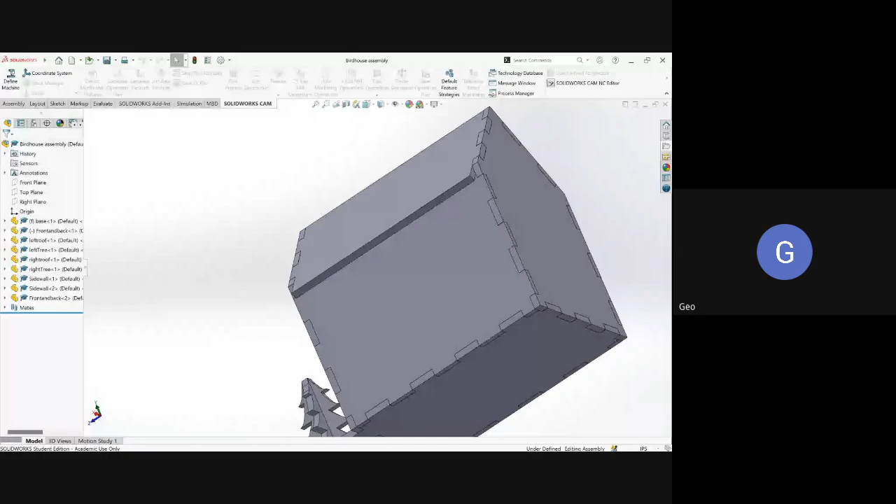All right, we are going to run through how to make a birdhouse like this. Now, obviously, this is missing some details, and as you make yours, in addition to the details that this is missing, try and make it unique, make it your own.

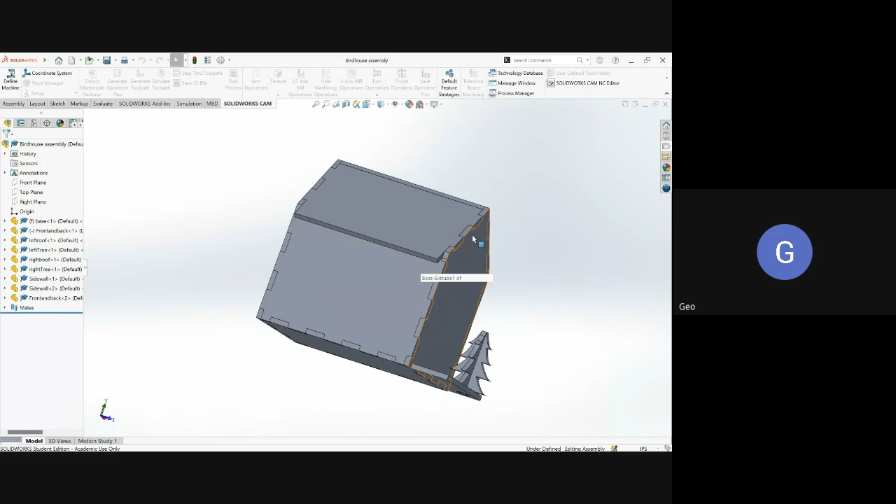Try and also understand the different types of joints used to create this project. If you have a good understanding of those, you'll be able to use them in future projects and won't have to copy.

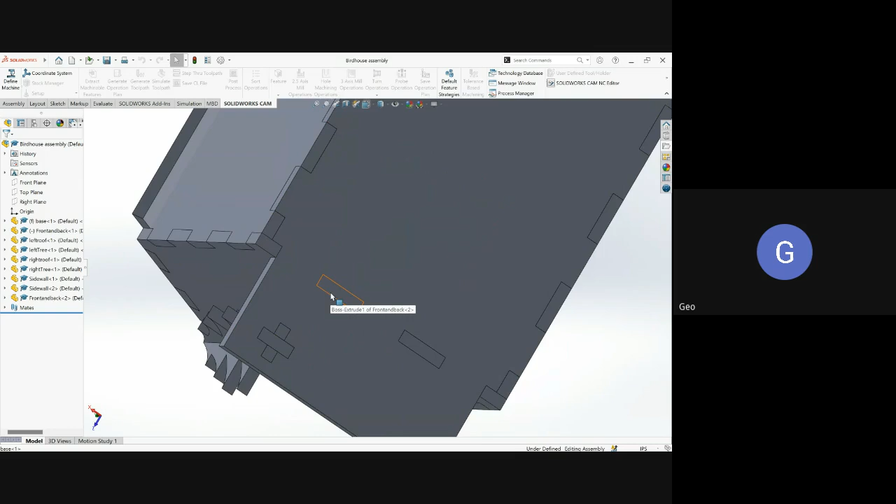So these are finger joints along the side, and joints where you get something slotting in here like this, that would be a mortise and tenon joint. And then actually, I mentioned slot, but the tree was made with a slot joint, a little bit hard to see from this angle.

But as you look at the part files, you'll be able to understand how the tree was a slot joint. So those are the three main types of joints.

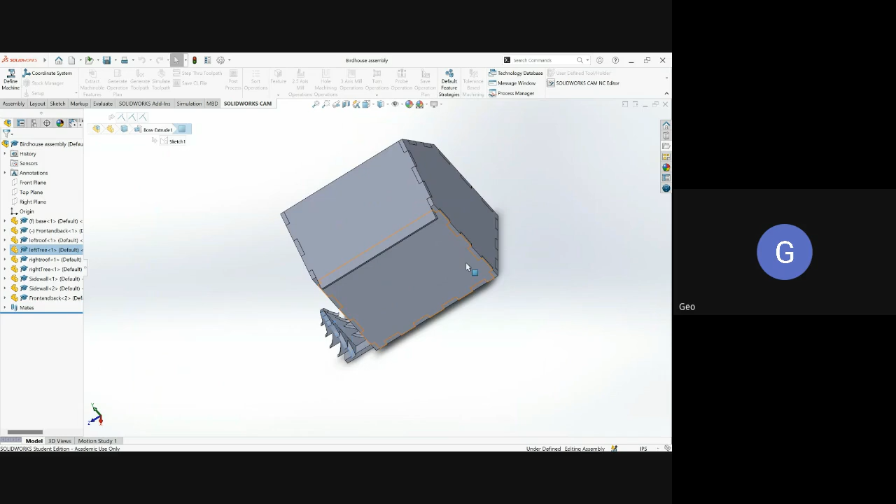There are other things you can do with the laser cutter to make curves and other things, so don't be afraid to use Google to come up with ideas.

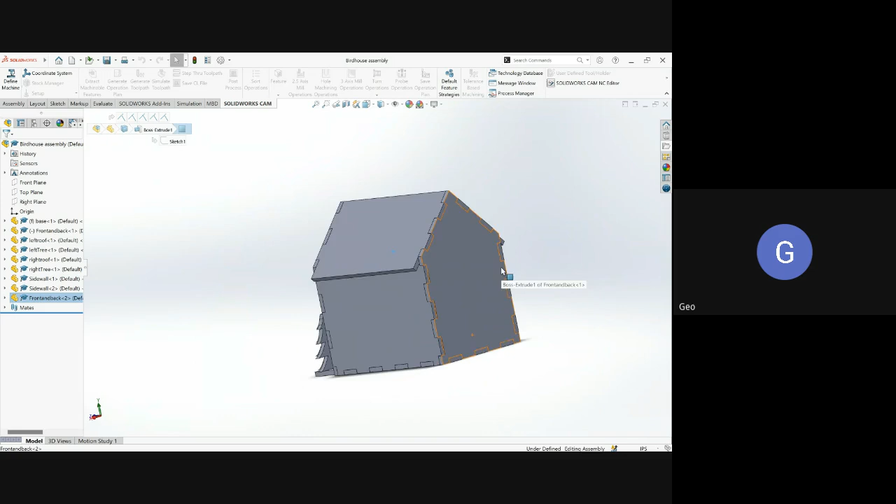Also, this is partially why we do this, because I am now seeing there's a little error in my file. So we're going to make this in SolidWorks, and then you'll be able to laser cut it. But if there are things that don't match up in SolidWorks, that saves us some material.

All right, to get started, you would do File, New, Part, and you are going to start immediately by checking what units you're in.

So we do not want to be in MMGS, that's probably what your SolidWorks defaults to. We want to be in IPS.

Once we are in IPS and we're in a new part, remember there's the features and the sketch menu. We always start with a sketch, and I'm going to show you all this.

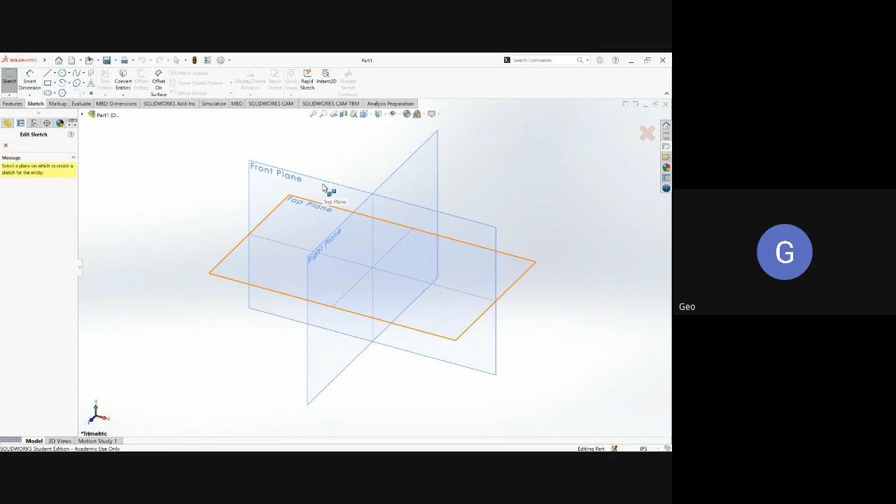So we click the cogwheel up here, switch over to document properties, click grid snap, make sure display grid is on, major spacing 1 inch.

Our material is 1/8 of an inch, so we're going to divide our inch major spacing into minor spacings of 1/8 inches. We will go to system snaps and make sure enable snapping is on.

This grid is the one that's really important, so when we're done here, we can hit OK.

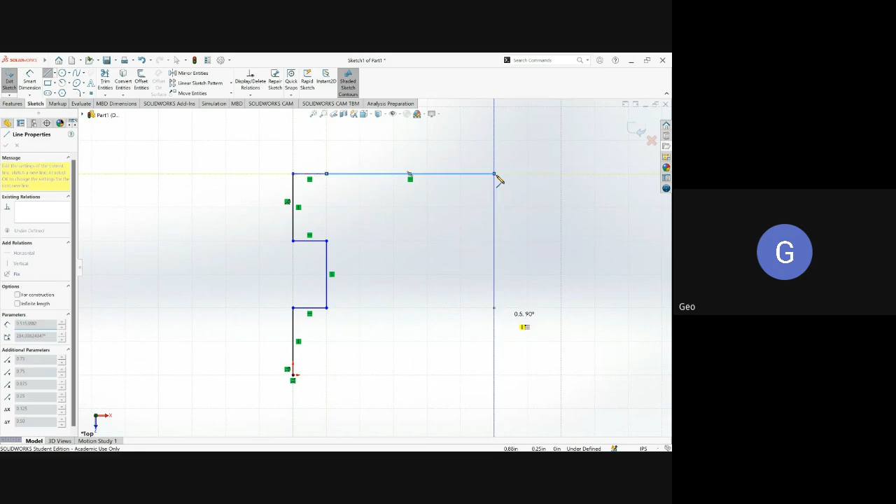Then you'd be able to follow the template on Schoology to create something similar to what we had before. Eventually, this is not how you would make it, but I'm just going to do a little demo real quick.

Eventually, you're going to need to go to your three-dimensional features menu and extrude it. Remember, our material is 1/8 of an inch, so in SolidWorks, you can type in mathematical functions.

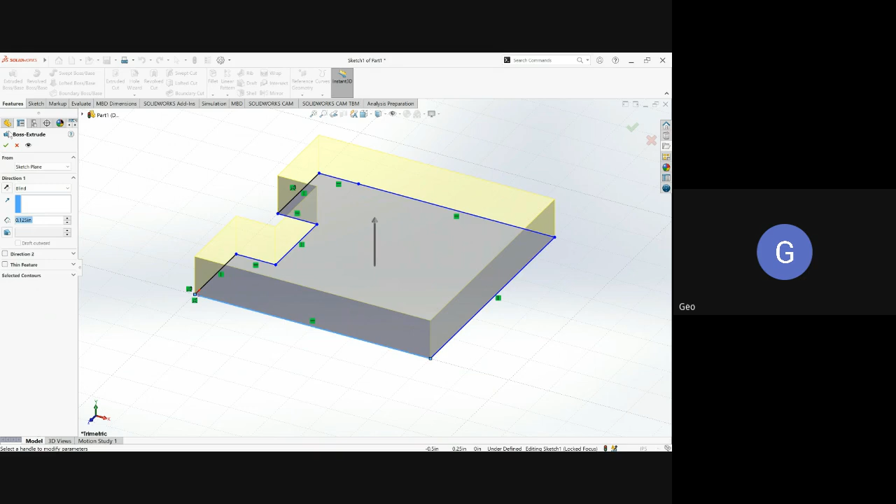I'm going to go ahead and jump ahead, and we'll open up one of these faces. Okay, open part. Edit.

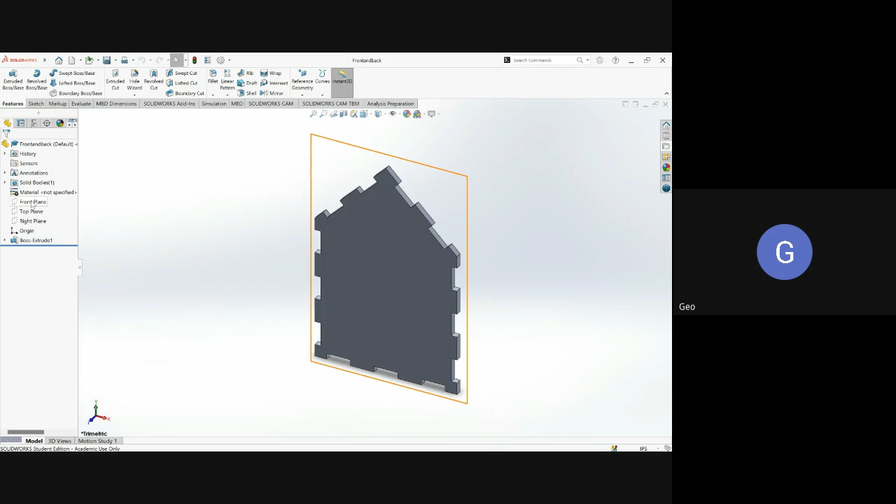Okay, so remember, you can either edit a sketch or you can edit a feature. I can right click on this feature to edit it. If I wanted to change the depth of it, or if I want to change the actual sketch I created, I can right click on it.

And click this edit sketch. Okay, and my grid isn't on in here.

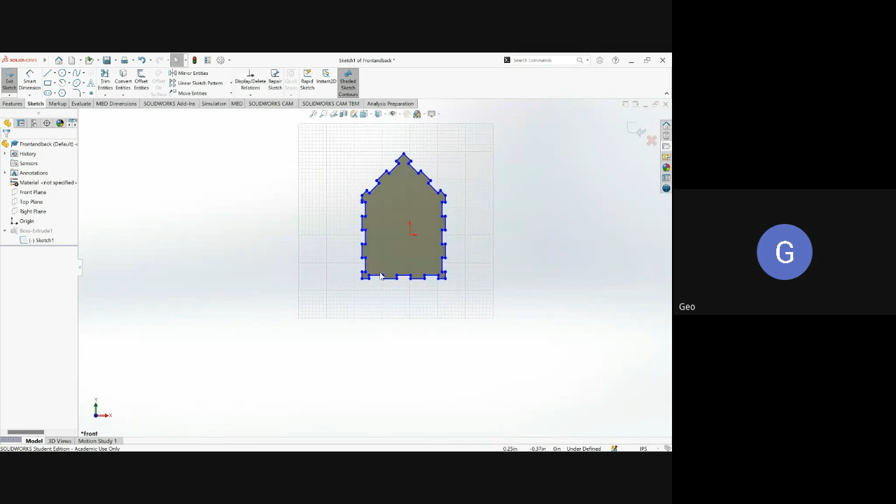Okay, so off the bat, mine probably isn't going to be on the grid. So there's a couple of handy tools. If you find your object is not on the grid, there's this move entities.

So I click and drag to select everything that I want to move, and then it asks for the starting point. So I'm going to select one of these points in the corners, and then I can snap it back onto the grid.

Now, the other thing you're going to notice is when you get to this piece specifically, it's got some 45-degree angles. And if you try and use the grid, it's not going to be on the grid.

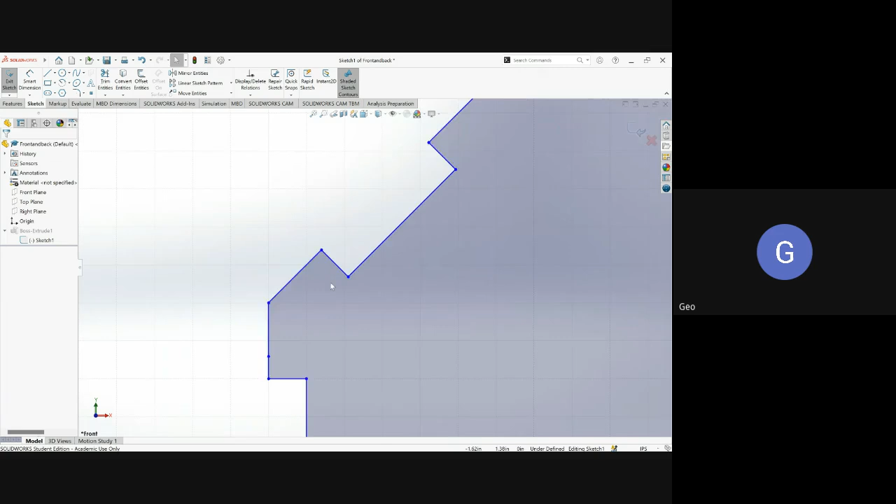So you could do it with the Smart Dimension tool, and it's always wise to use the Smart Dimension tool as often as you can. The other way to do this is to rotate this back onto the grid. So under Move Entities, there's also a Rotate Entities.

And so let's select everything and rotate.

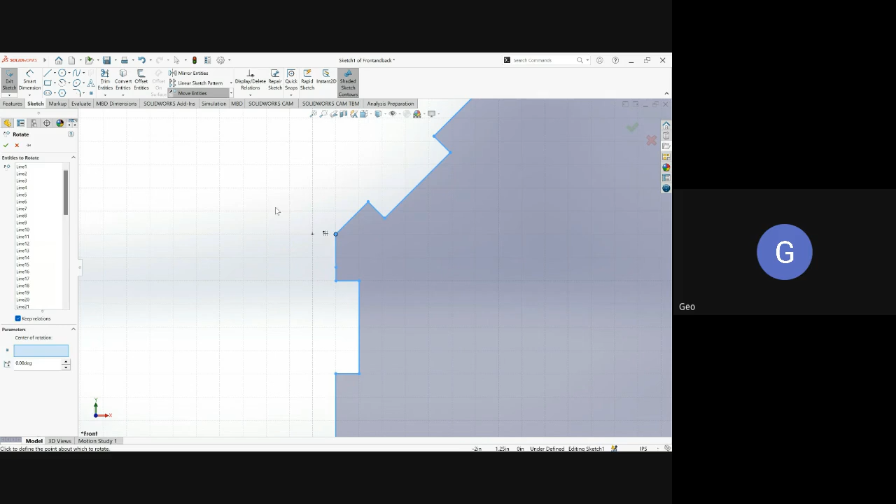Center of rotation, I could do this point since it's on the grid, that'll make it easiest. And then we'll go 45 and make it go the other direction.

This would work. And then, actually, yeah, this works terrific. Okay, so both of these are on the grid.

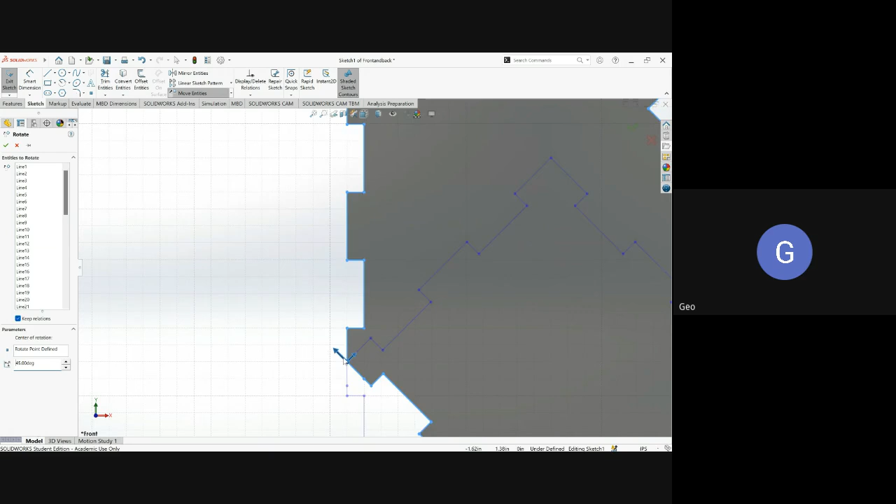You might need to do 360 divided by, or 360 minus 45 if your rotation ends up going the wrong direction. But this would work, and then you'd be able to follow along and create this top portion.

So again, this would only be if you made the bottom part and now you need to make the roof part, and you notice it's at a 45-degree angle, so it won't fit on the grid. So my next steps would be to sketch out what's already there, but I already did this.

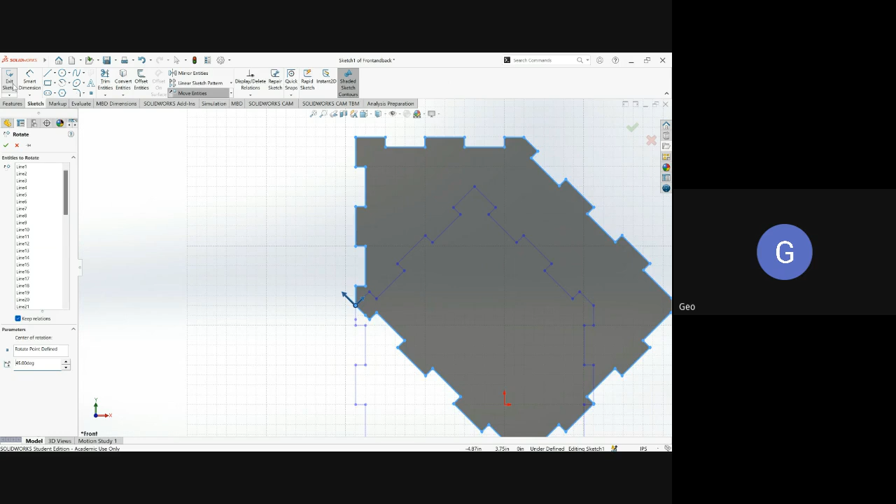So, okay, as a reminder, you're going to make each of these as a different part. You'll save them, and then you'll end up with...

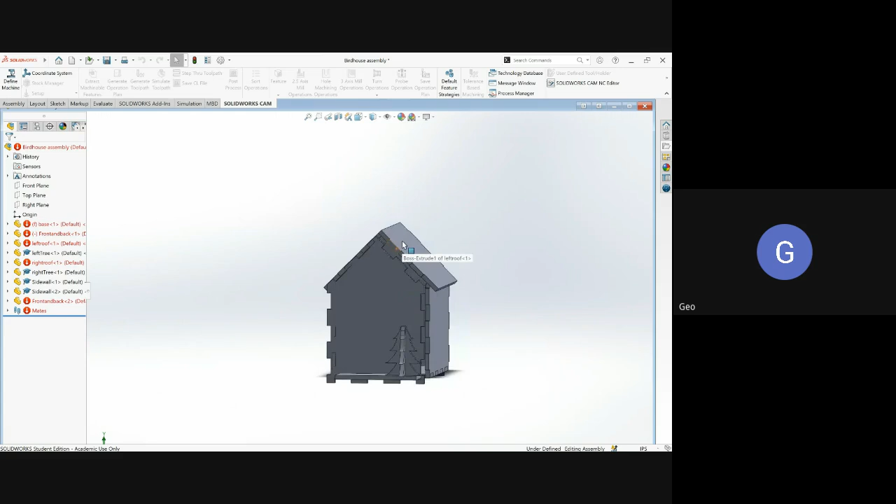Well, I broke it, but you saw it before. It was working.

Just as a reminder, as you assemble in here, you can mate together faces, but it's probably wiser to mate together edges. If you mate together edges, you theoretically should only need 2, whereas if you try and mate faces, you're going to need more than that.